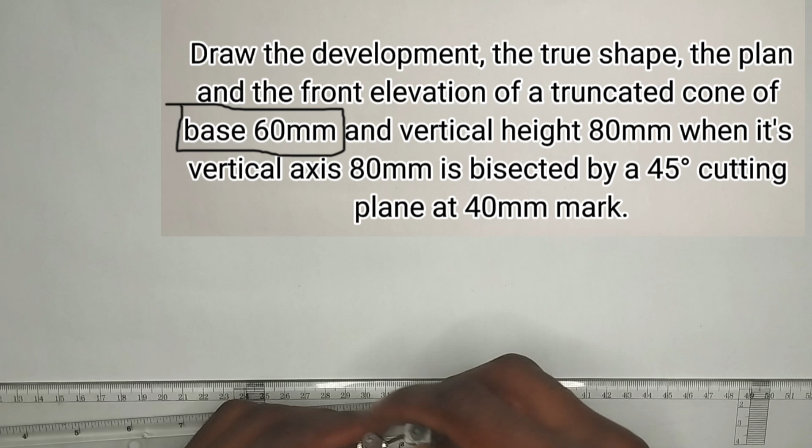So now what we are going to do first is to draw the base, which is like the plan. We have been given the base to be of 60 millimeter, so I'm going to pick a radius of 30 millimeter on my compass, then place it at any convenient point on my drawing paper. Then I'll draw my circle. The next thing we are going to be doing is to divide this given circle into 12 equal parts.

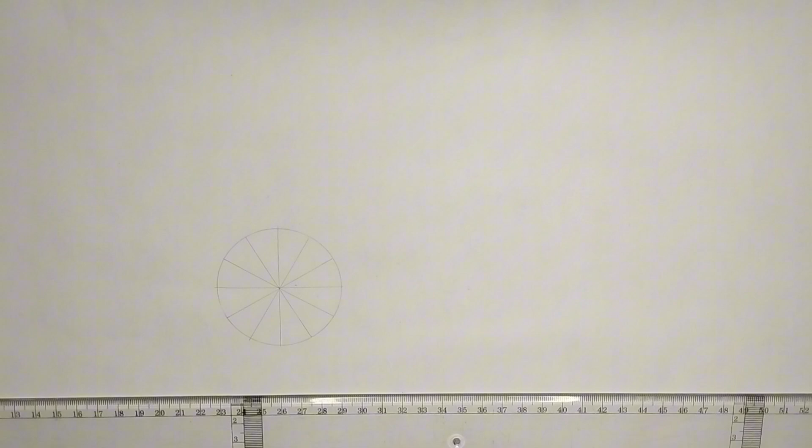So this is it. We are going to divide this. Now after dividing the circle into 12 equal parts, the next important thing is to label the circle. We are going to start with labeling here as 1, 2, 3, 4, 5, 6, 7, 8, 9, 10, 11, and this is point 12.

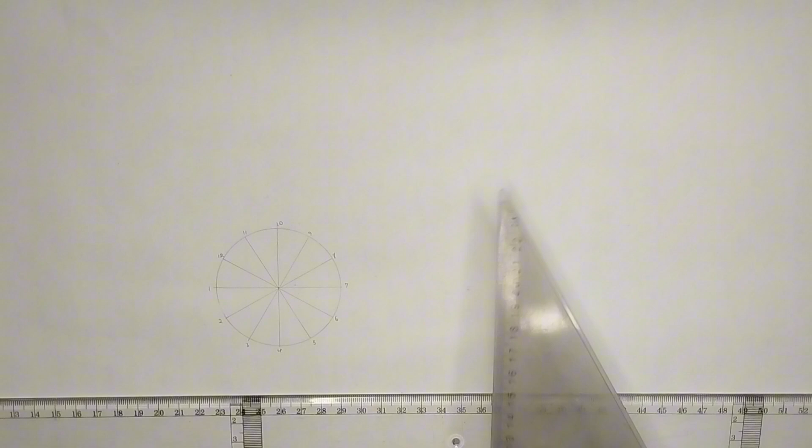Now we are going to move straight to the front elevation. First of all, I'm going to project a line from this point upward in this manner, then project another line from here upward like this. At this point I'm going to draw a straight line. Let's label here as point A and this point as point B.

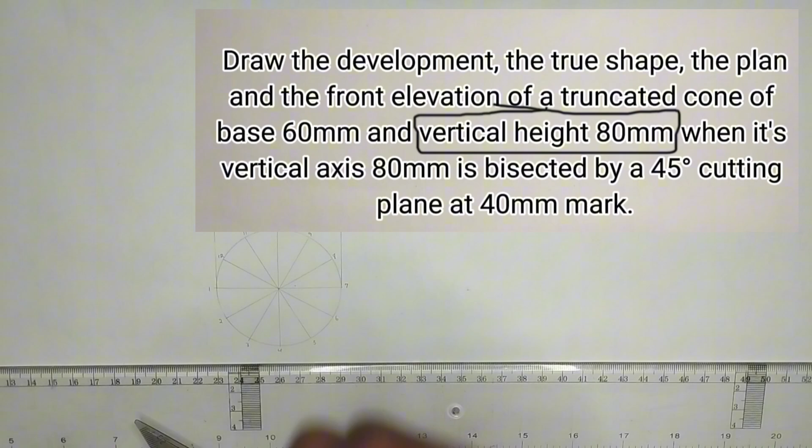Moving back to the question, we have been given the height to be 80 millimeter. So from this center here, I'm going to draw a straight line upward like this. This is 80 millimeter. So this is the apex. I'll label that as point P. From point A I'm going to join it to point P, then from point P I'll be joining it to point B, which is the base.

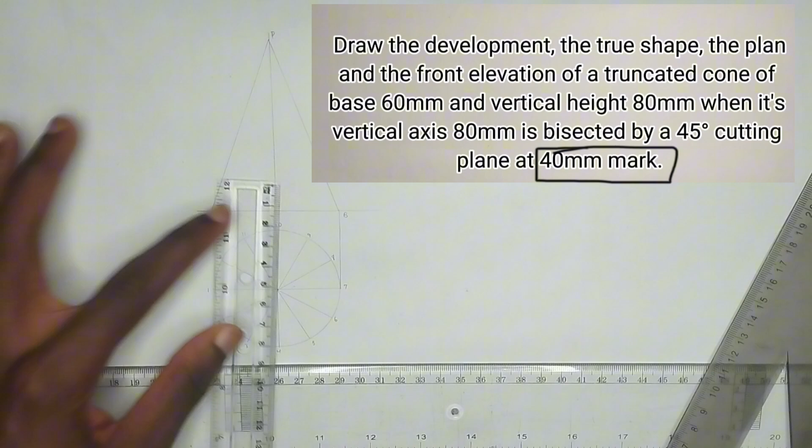The next thing we are going to do now is to truncate this front elevation, and we have been given from the question that it is bisected by 45-degree cutting plane at 40 millimeter mark. So I'm going to pick 40 millimeter first, then pick my 45-degree set square. We are going to bisect it right in this manner. Let's thicken out this part.

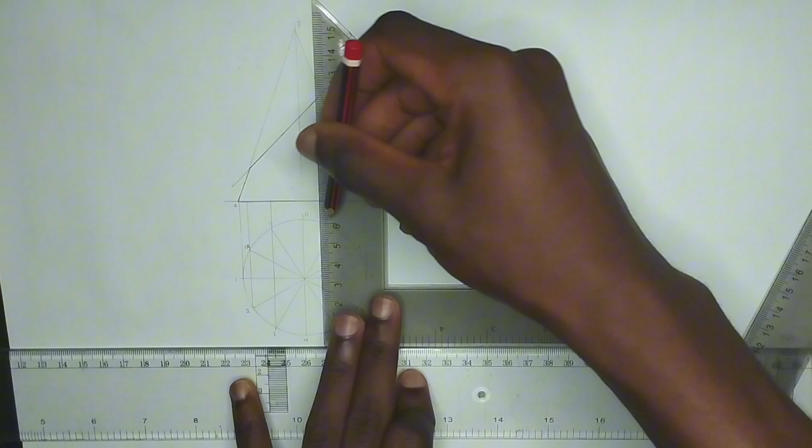Like this. The next thing we are going to do now is to project lines from these other parts to the base of this front elevation. Then from point 3 and 11 I'm going to project also like this. We have projected that. Then we are going to project this, and we are going to project this.

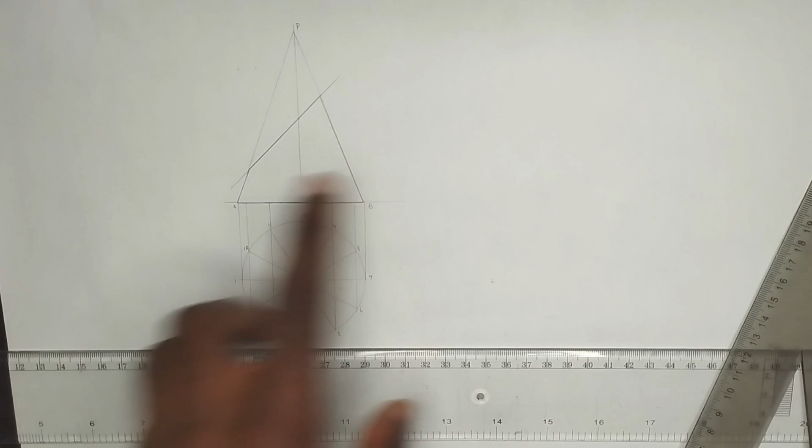In order to make your work easier while drawing the true shape and the development, we are going to be labeling these points here. I'm going to label here as point 1. This is A1. Then this is point 12 and 2, so I'll put it as 2, 12. Then this is 3 and 11, I'll put it as 3, 11. This is 10 and 4, so I'll put it as 4, 10. This is 5 and 9, so I'll put this point as 5, 9.

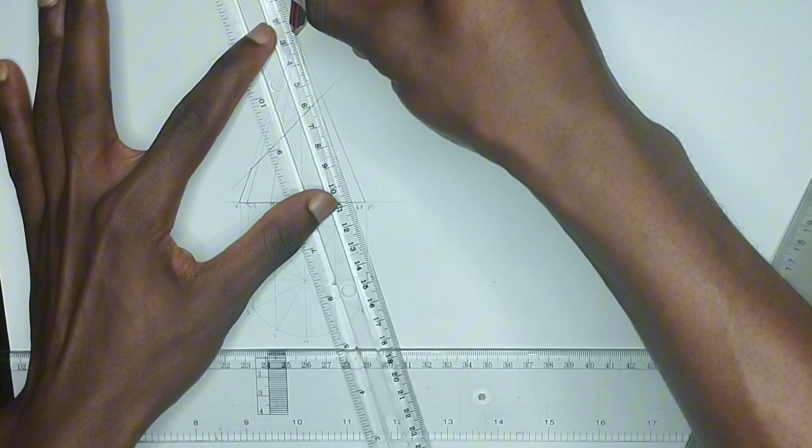This is 6 and 8, so I'll make this 6, 8, and this is 7. All right, so now what we are going to do is, from these points, draw lines to the apex, that is point P. From this point, we'll draw a line to the apex point P like this, and like this. Okay, so it's going to be in this manner.

Now what we want to do is to draw the plan of this particular truncated cone. That's what we want to do. In order to do that, we are going to be drawing vertical lines from the part where these lines we drew to the apex are touching the cutting plane. So it's going to be like this. We are going to be drawing it downward starting from here.

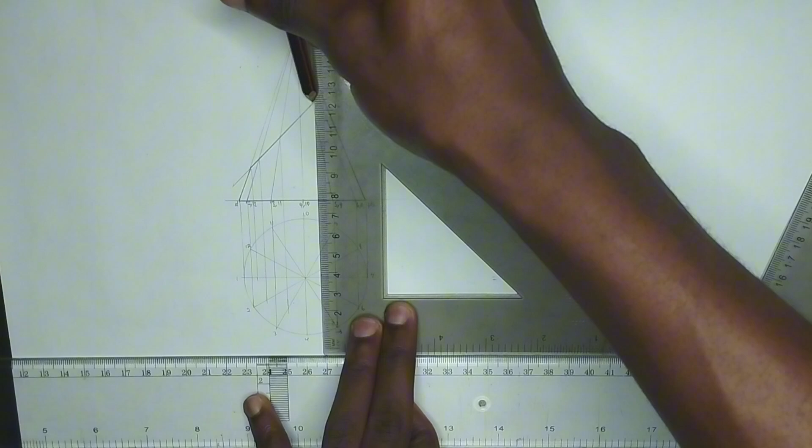Then we are going to draw this also downward like this, then this part also like this. Let's project that downward like this. Then here also we are going to project this downward. Then at this point also we are going to do the same thing like this. Then this last part we are not going to leave out, we are also going to do the same. Okay, like this.

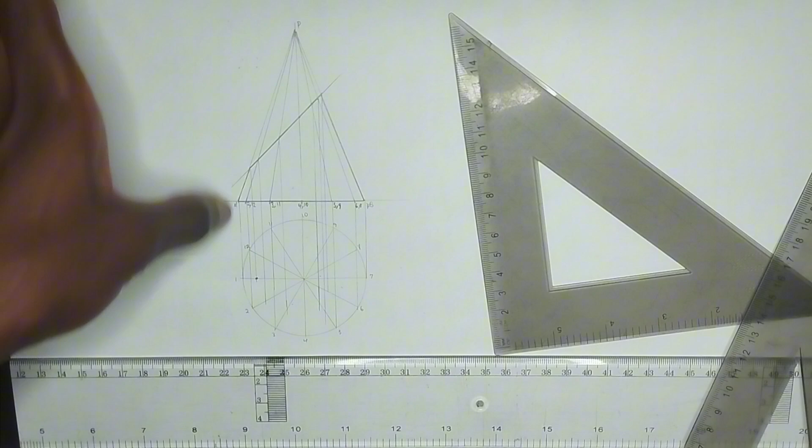So now what we are going to be doing is to pick the points of the plan. We are going to start from here. This is point 1, and this is point 1 here. So this is point 1 and this is point 1. So we are going to be picking this point here: this is 1 here, going here and coming here. For this other part, this is point 2 and 12, coming down. So the part of point 2 and 12 is exactly where we are going to pick 2 and 12.

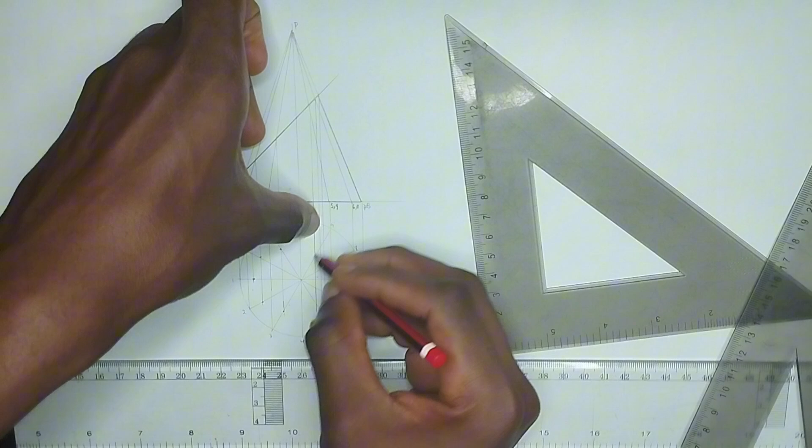The next one is for 3 and 11. So we are going to look for where 3 and 11 is. This is 3 and 11, like this. We are going to leave 10 and 4 for now. Then we move straight to 5 and 9. This is point 5 and 9 here, coming down like this. This is 9 here, then this is 5. So we'll pick this point and this point.

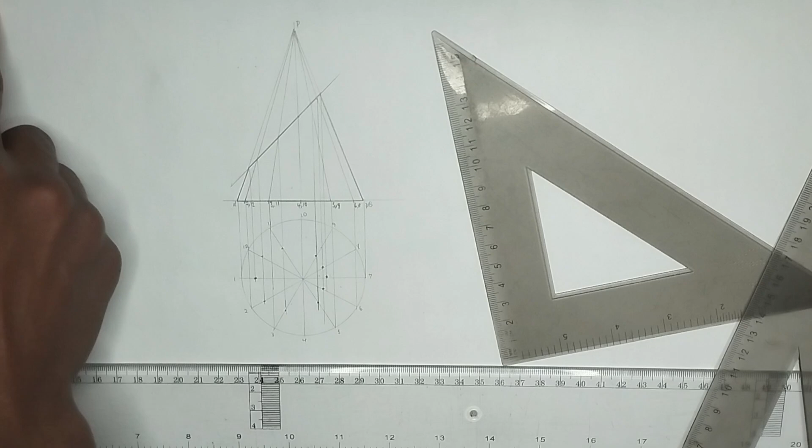Then we move to 6 and 8. This is 6 and 8, coming down like this. So we'll pick here. This is 8, then this is 6. Then this is point 7. We are going to trace this last point downward, then pick point 7 here.

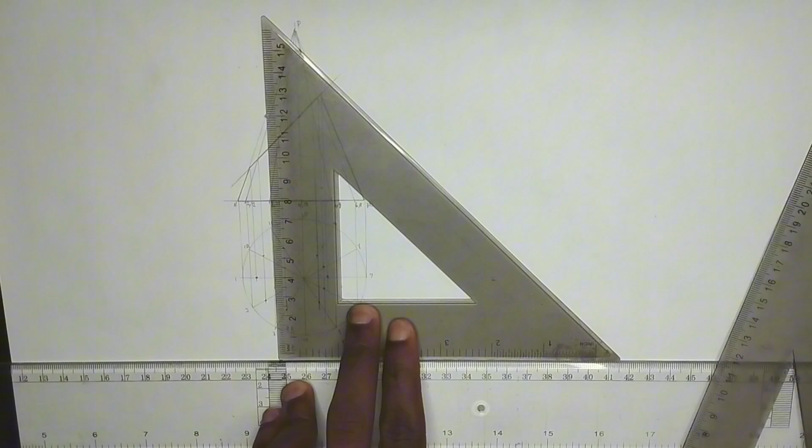Now we want to draw the circle, but in order to draw the circle we have to pick points 10 and 4. To do that, we are going to draw a straight horizontal line at this center point here, which is going to touch this line AP here. Then from that point where it is touching, we are going to draw a straight line downward, projecting it downward in this manner.

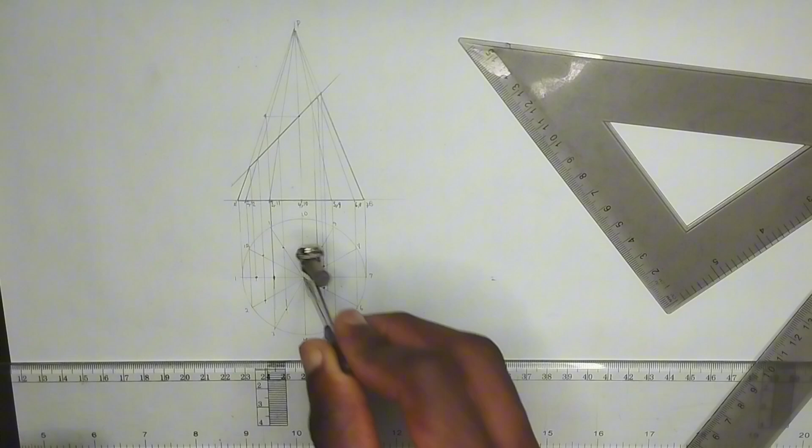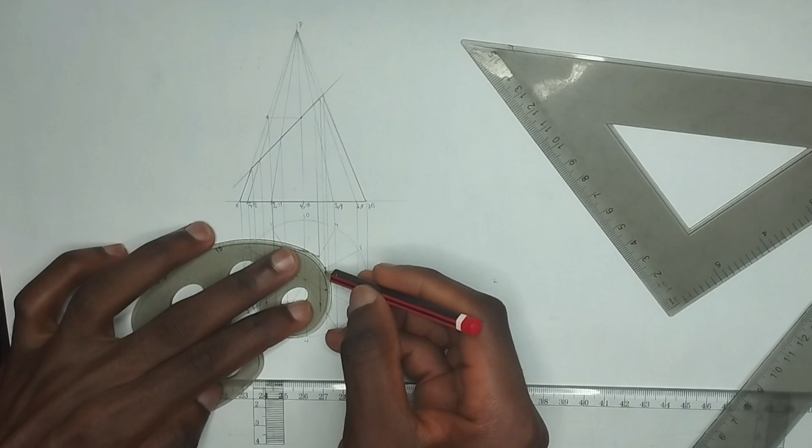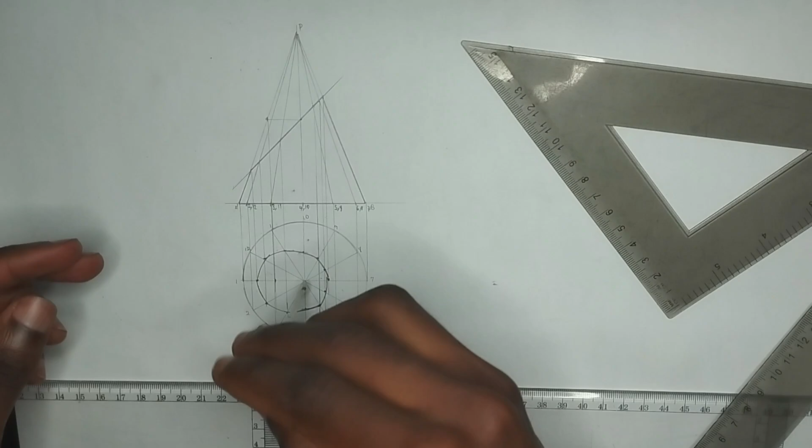So this is the circle. This is the plan. We can thicken out the outer circle also. Okay, so this is our plan.

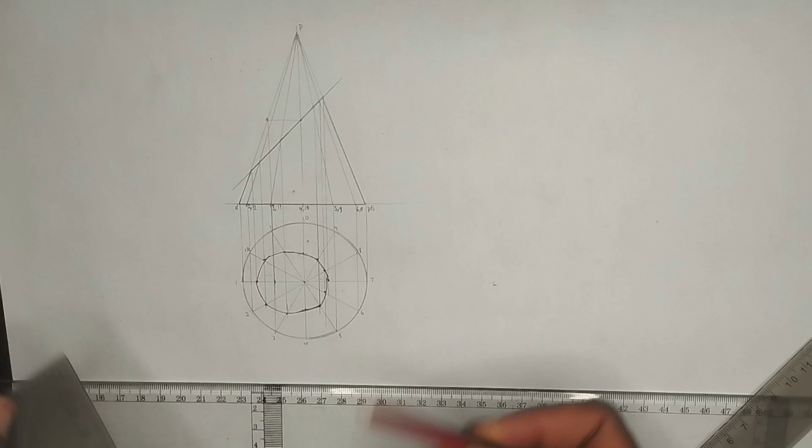Now we move to the next question, which says we are to draw the true shape of this truncated cone. In order to draw the true shape, we are going to pick our ruler and our 45-degree set square. Then place it like this. Let me extend my ruler backward a little bit. Then I'll draw 45. I'll draw this also. This is perpendicular, sorry, at angle 90 degrees.

Okay, at angle 90-degree. I'll draw this also at this point. Then at this point also, I'm going to draw a line here also, like this, then like this, and then like this. So we are drawing these lines here at 90-degree to this cutting plane. These lines are at 90-degree to this cutting plane.

So the next thing we are going to do in order to draw the true shape is start with the first point. I'm going to pick my compass, then trace this point. Okay, this point 1, place it here. Then from here I'm going to pick to this point. Then trace it upward and strike an arc. So this is point 1 here. This is the point 1.

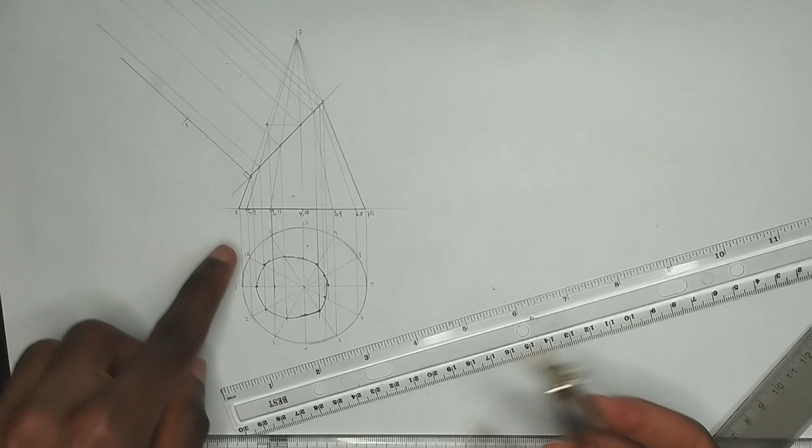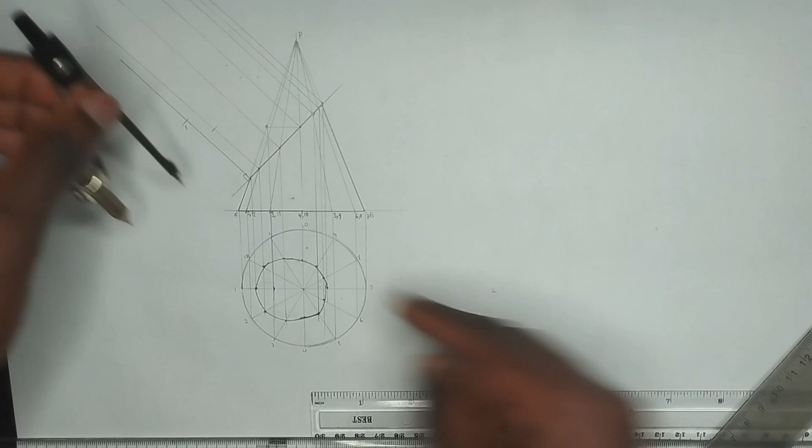Now we are going to move to point 2 and 12, which is here. So we are going to trace it downward to this point. We are going to pick this point here. Then we are going to place it here, strike an arc. So this will be the point 12. Then still on the same point, we are going to pick this point 2 also. We are going to extend our compass to point 2, place it here, then strike an arc like this. So we have picked 3 points.

Now we move to point 3 and 11. So from here to this place. This is 3 and 11. Okay, we are going to pick here like this. This is the 11, so we are going to pick here. Then place it here, strike an arc. Then we'll place it here also and pick point 3, then place it here, strike an arc.

So we are going to do the same thing for 4 and 10, which is going to be here. Place it at the center here, strike an arc, then place it here, likewise here, place it here, strike an arc like this. We'll move to point 5 and 9, which is here like this. This is 5 and 9, so we'll place it here. Put it on this point here, trace it upward like this, strike an arc.

Then from here also we'll put it on this other part here, so trace that upward also and strike an arc. So we'll move straight to this other part also here, which is this place. Place it here, then trace it upward in this manner, strike an arc here, on this line. Then we'll place it here also, like this, to this point. Then trace upward, strike an arc.

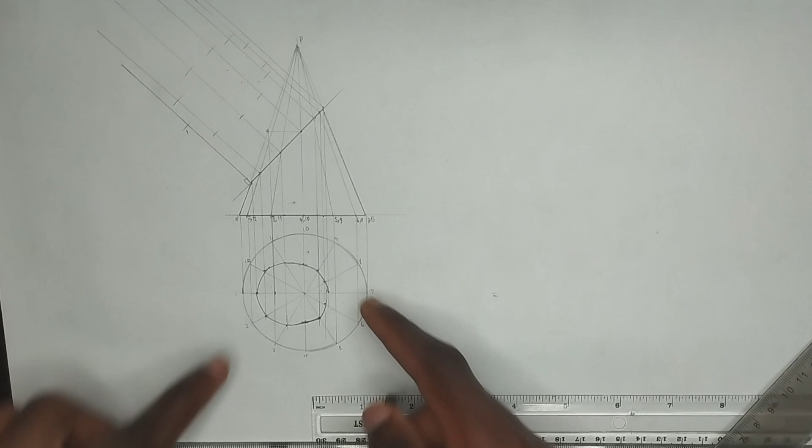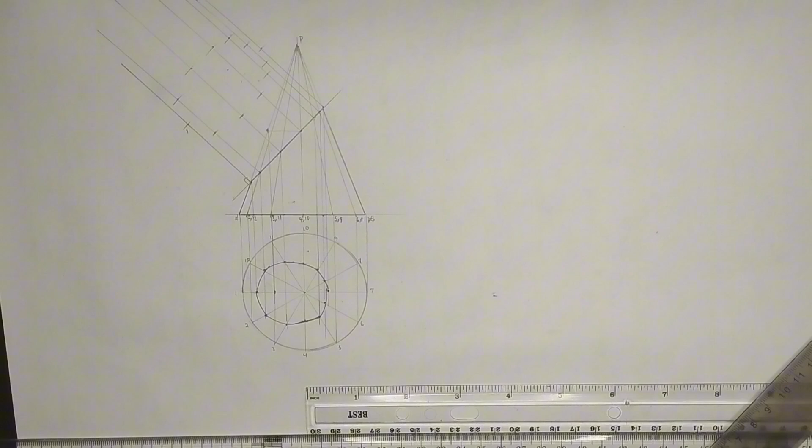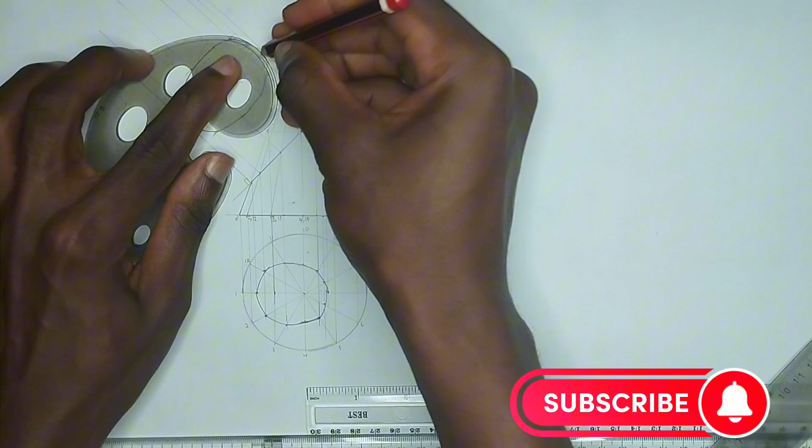So we are going to move to the last question, which says draw the development, which is like the basic question we have been given in this particular video. So now, in order to draw the development, we are going to place our set square and our ruler at this point here. I'm going to pick a line which is parallel to this line here. Then I'm going to bring it outside like this. From any convenient point, I'm going to draw a straight line in this manner.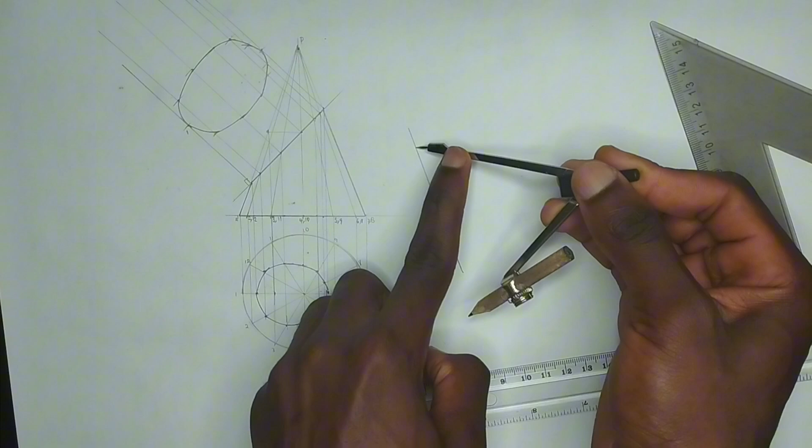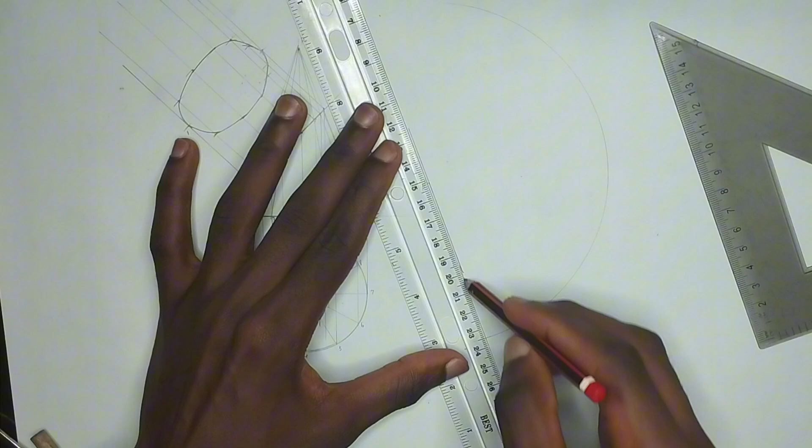Then I'm going to pick my compass and measure the length from here to here, which is length PB. That's the length we are going to be making use of. So at any point on this line, I'm going to pick my compass and draw an arc like this. So this point, let me label it as point P prime. So we are going to extend this to touch this particular point here.

Now the next thing we are going to do is divide this arc into 12 equal parts. We are going to pick the length of this division which we made on the plan, because the development is just like the front view, you cutting it then opening it.

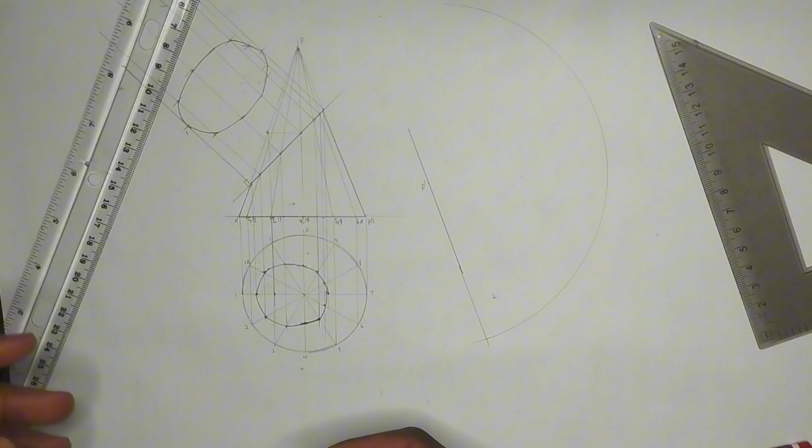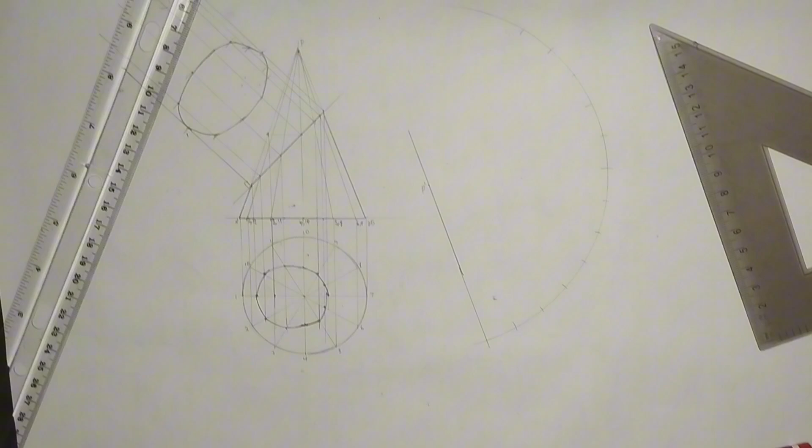What you get is the development when you cut and open the cone. So what you get is the development. So I'll pick point 4 and 5, or 6 and 5, whichever point you want. Then from here you are going to strike 12 points. This is point 1, 2, and this is point 12. All right, so those are the 12 points we are going to be making use of.

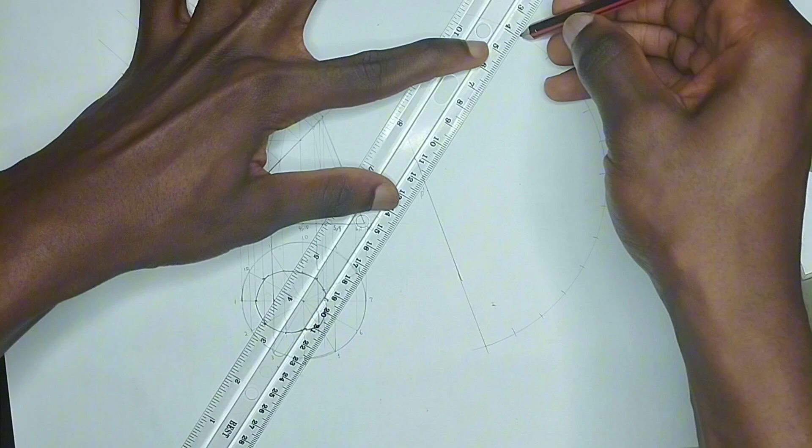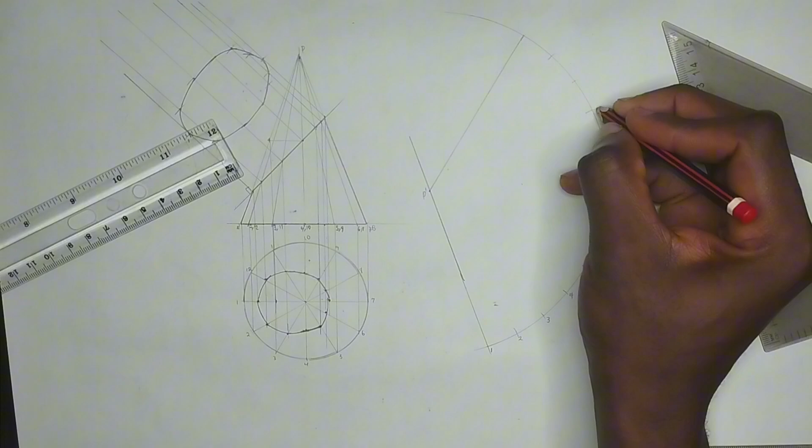Now we are going to join this to the last point like this. Okay, so the most important thing now to do next is to do our labeling. We are going to be labeling those points. All right, so we are going to start with this point. This is point 1, this is 2, this is 3, 4, 5, 6, 7, 8, 9, 10, 11. This is point 12, and this is point 1.

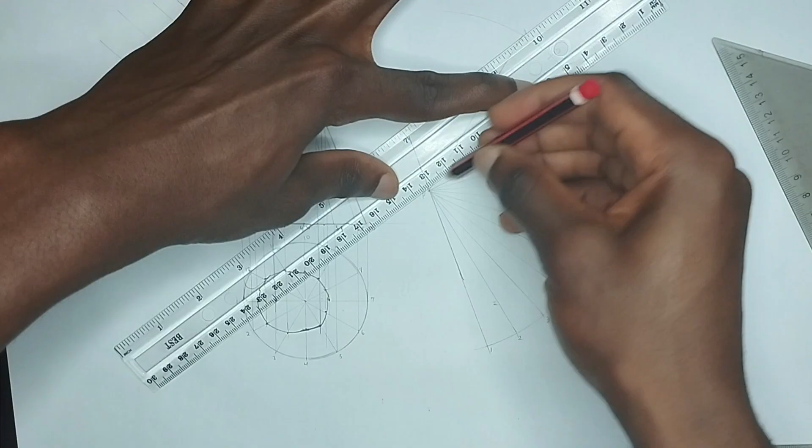All right, so from these points we are going to be drawing straight lines. Okay, from P we are going to draw straight lines to those points. Okay, so this is the first thing we are going to do. So now we are going to pick our set square, then place it at this front elevation here. So at these points here we are going to be projecting a straight horizontal line to the side like this. Okay, in this manner.

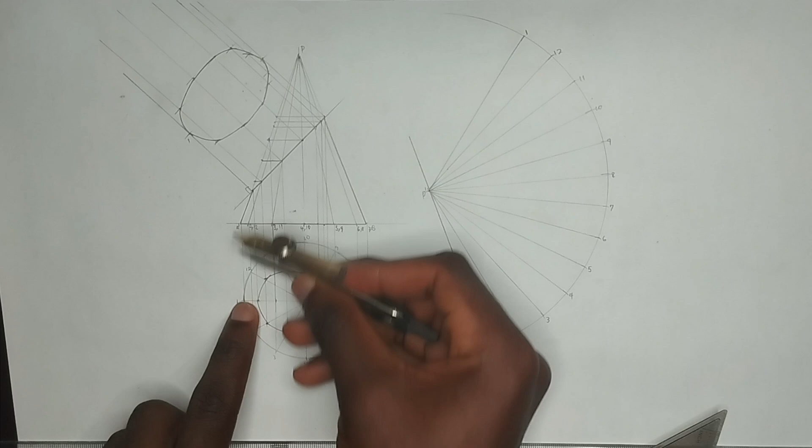So okay, we projected this already. Then to the side, from here also project to the side, and from here also we are going to project to the side. So these points here, like this. So now we are going to pick our first point, which is point 1. Okay, this is point 1 here. So I'm going to pick from point P to 1. I'm going to place my compass at P prime here, strike an arc on 1 and on 1 also. Yeah, these are the two 1s we have.

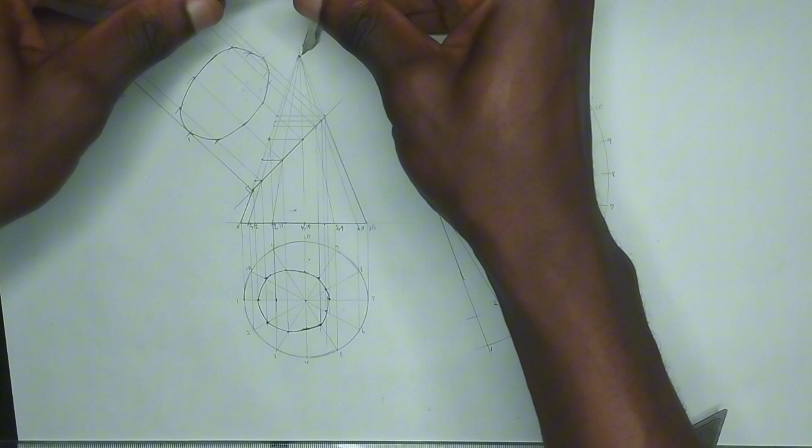Okay, so now we are going to move straight to the next level, which is 2 and 12. So I'm going to place my compass from point P to the length of 2 and 12. Okay, so when I put it on P prime, I'm going to strike 12. I'm also going to strike 2, like this. That's why I said your labeling is very, very important. Okay, so I'm going to also place it on point P.

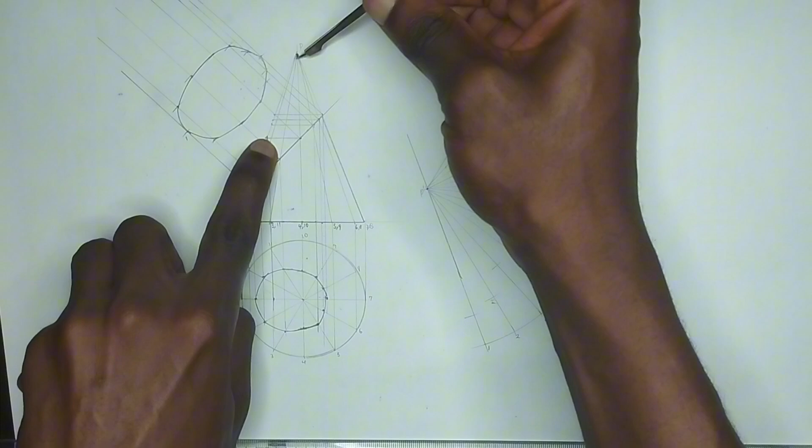Now we are moving straight to 3 and 11. Okay, so this is 3 and 11 here, so I'm going to place it here to this point. Okay, so then place it on point P. This is 11, and then this is 3. Okay, in this manner. So we'll move straight to 4 and 10, which is here. So I'll place it like this. This is 4 and 10. Okay, so from here, this point P prime, I'll strike 10. This is 10. Then I'll strike 4 also on the 4 mark. Okay, this is 4.

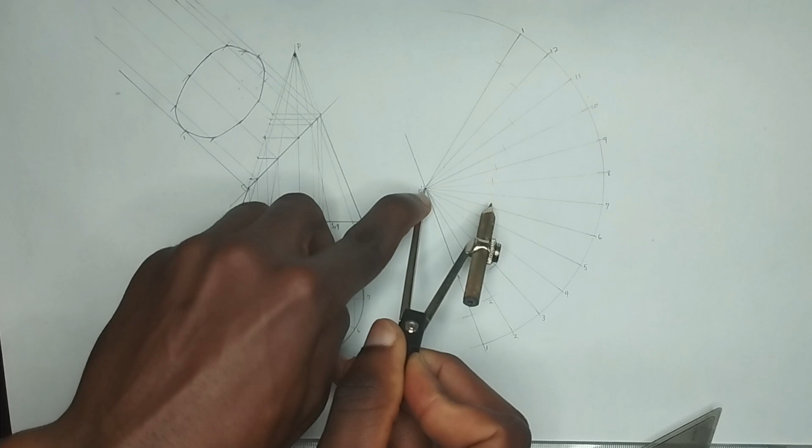The next one is 5 and 9. So I'll place it to this part. Okay, then from here, this is 9, and then this is 5. We'll strike those 2 points. Now we have 6, 8 and 7. So the next one is 6 and 8. So I'll put it from here to here. Okay, this point, this is 6 and 8. So at this point here, I'll strike here, then I'll strike at 6 also. This is 8 and 6.

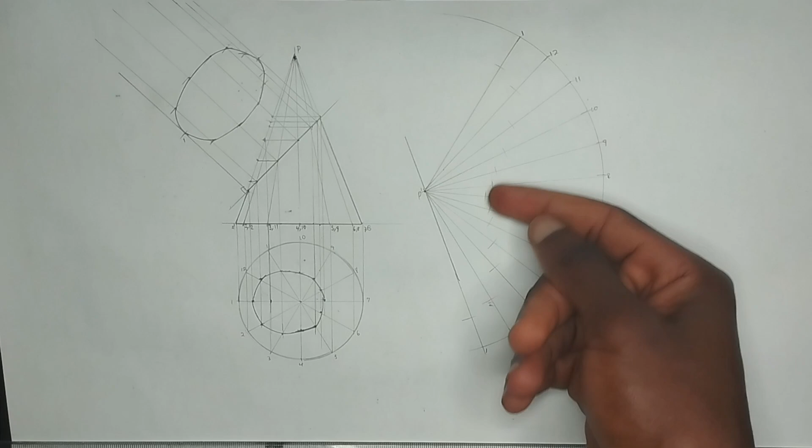Then the last one is point 7. I'll place it from point P here to 7, this edge here. So this is the last point here, 7. Okay, so these are the points we are going to be tracing to form the development of the truncated cone.

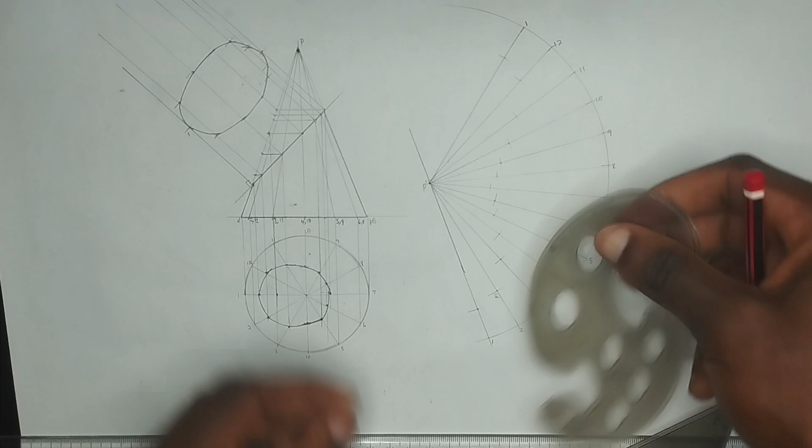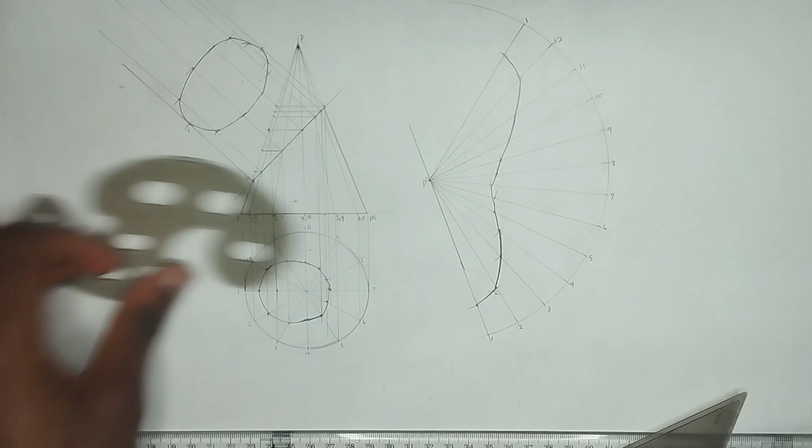So now let's trace those points making use of our French curve. I'll be fast about that. Okay, so like this. Okay, so this is the tracing here. So this is the development. You can likewise thicken out this part and thicken out the 2 edges here.